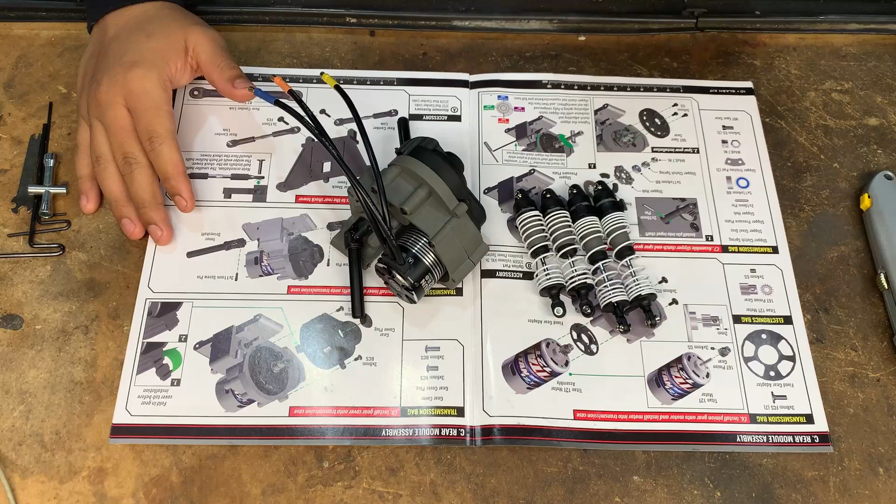Welcome back to the RC Garage, and today is part 3 of the Traxxas slash kit build. In the first 2 episodes, we assembled the rear transmission and also the shocks.

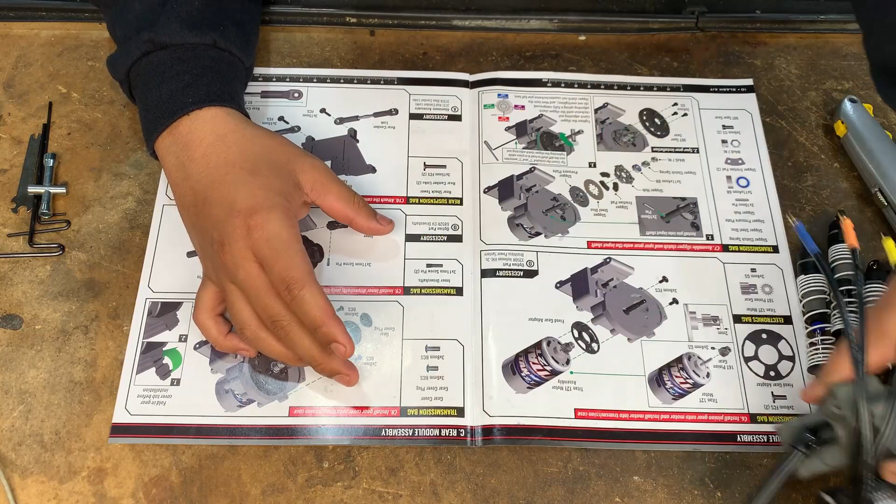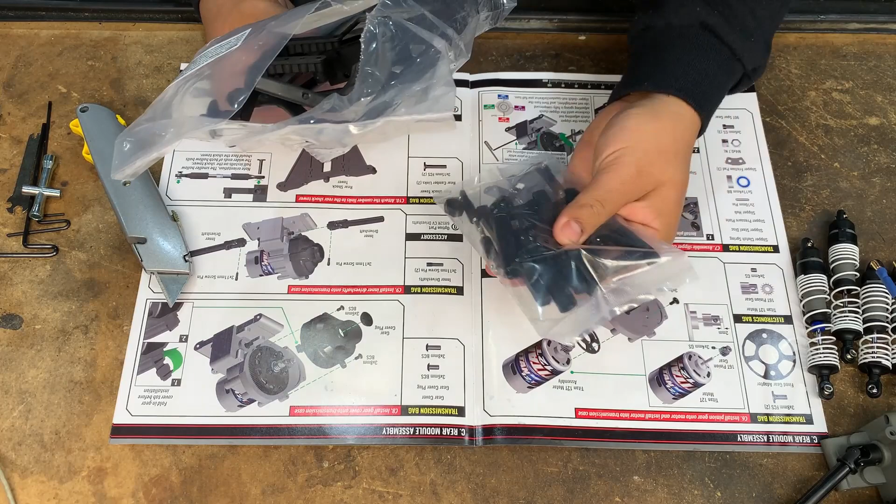Today we're going to start with attaching the camber links to the rear shock tower. I need to go into the rear suspension bag. The camber links are in there, and then the rear shock tower and the screws. There's a lot of screws in here.

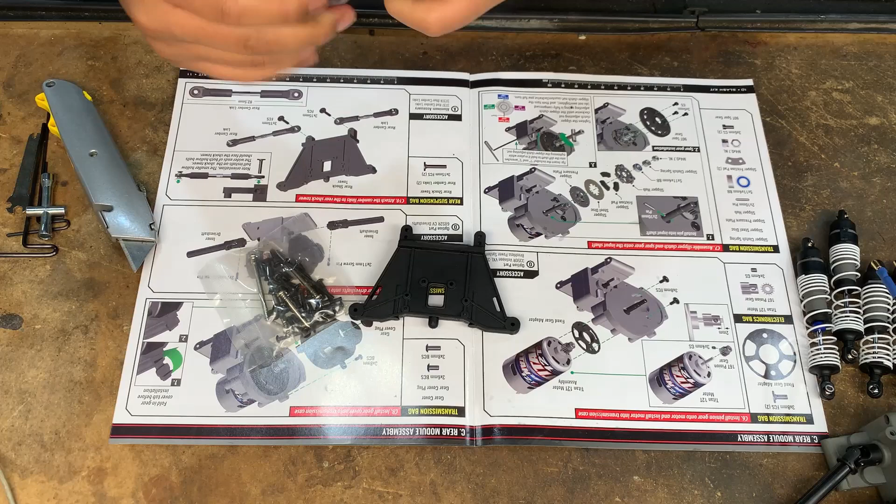Okay, let's get the camber links out. There, 1, 2. Okay, I'll put the rest of this to the side, we will need it later.

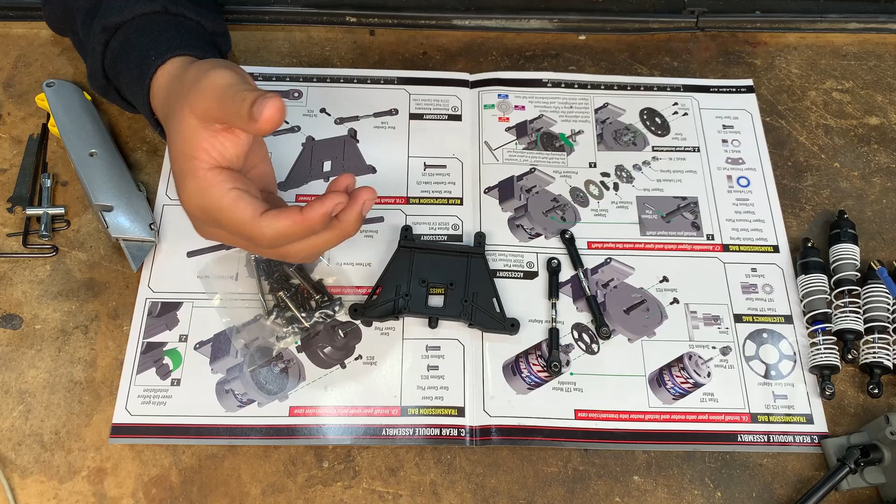And then we have the screws, let's get the screws. Okay, so it's a 3 by 15 millimeter screw. It's kind of hard to tell, but I think it's this one. And then there should be one more in here. Yeah, right there, and this one. Come on, come on. There we go, out. They're the same? Yeah, they're the same, and I don't think there are any other 2 screws like that. Nope, that's it. Okay, so we're gonna put those off to the side.

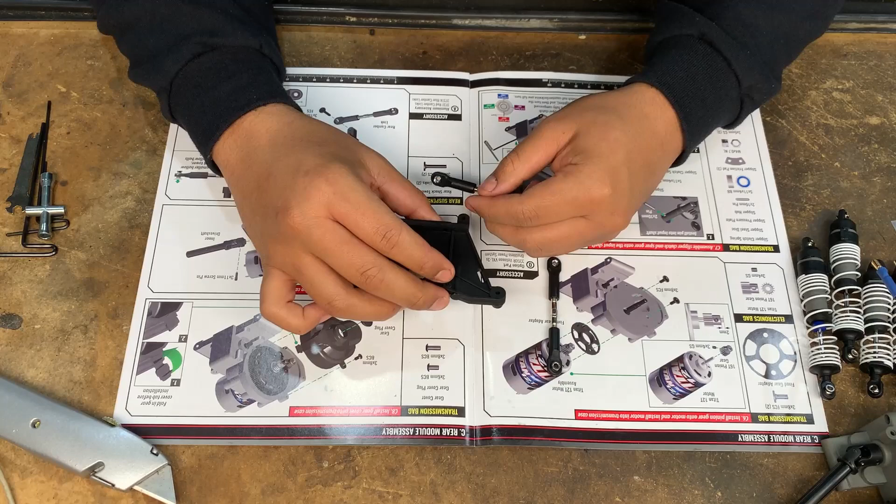Does it matter which way it goes? No, okay. It doesn't matter, but it matters outside and inside - it doesn't matter which actual camber link I use. So we're just gonna attach these. We're gonna put the side that's sticking out right here towards the outside, and then it goes into the bottom hole on the shock tower.

Does it matter which way the shock tower goes? I don't think so either. Oh wait, yeah, it does. So the part that the shock mounts, where it's coming out the back, you're gonna put it on the opposite side, the flush side. You're gonna put these camber links on that side. So I'm just gonna screw these in real quick.

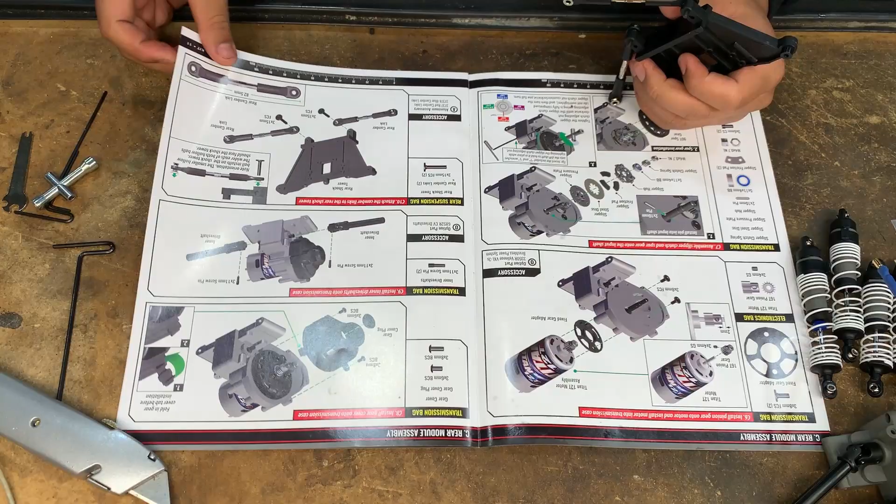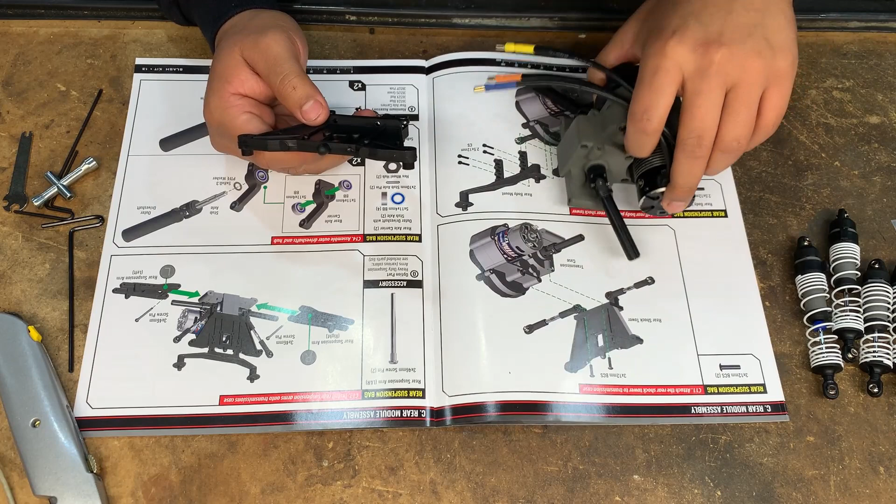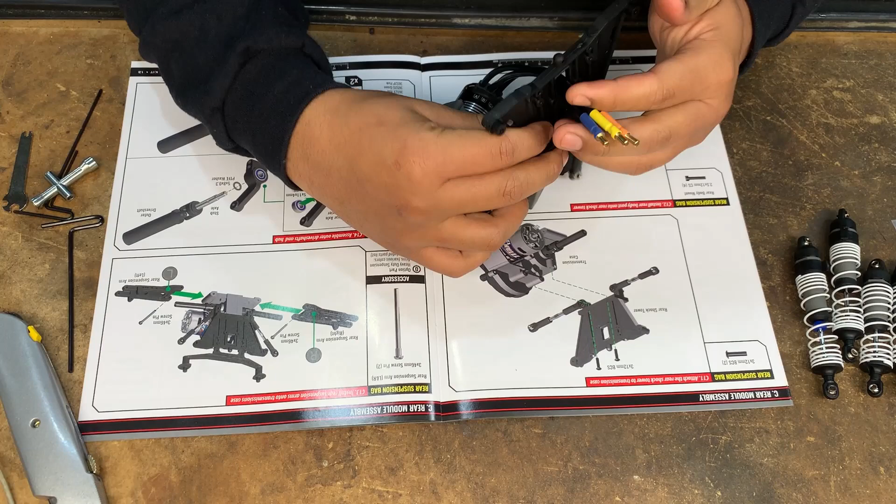Alright, so I have the 2 camber links screwed on. So next page - now we are gonna attach this to the transmission. Like this, it's gonna turn around like this, and then I'll put these through here. And put that right there. So it should go just like that.

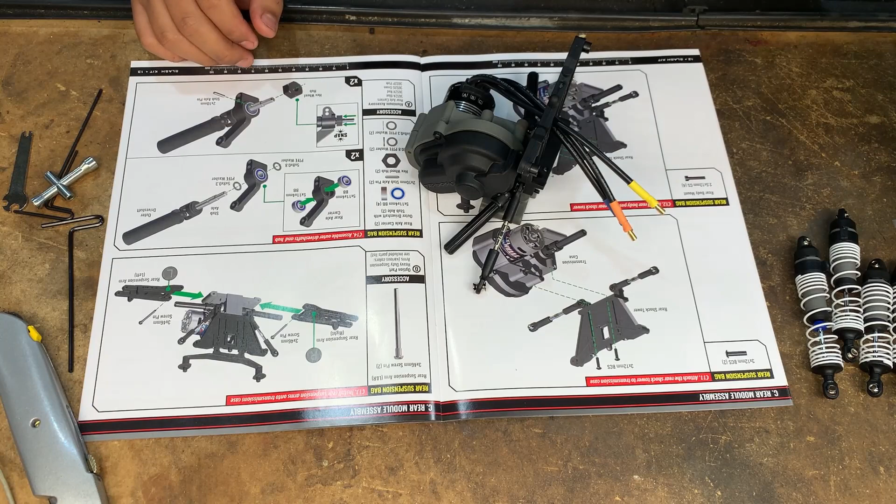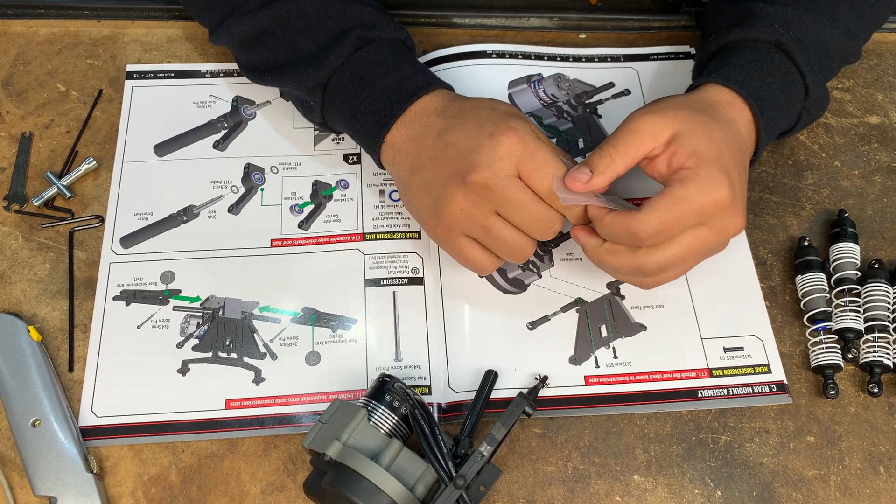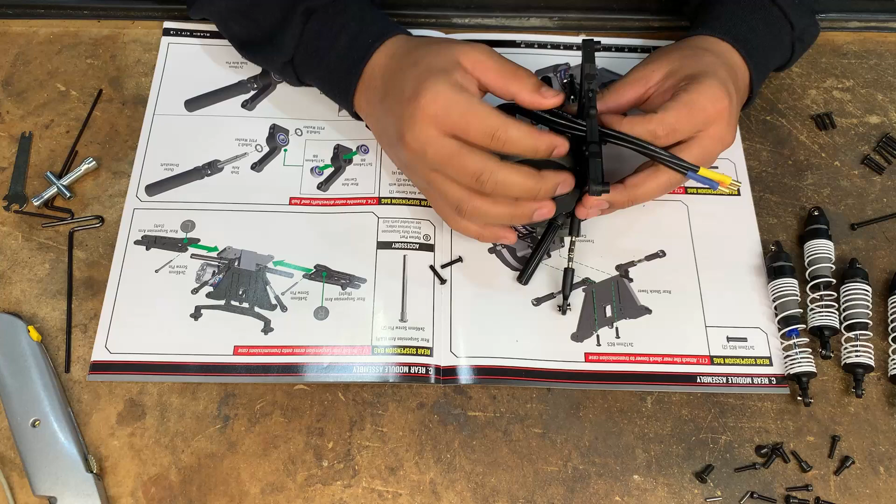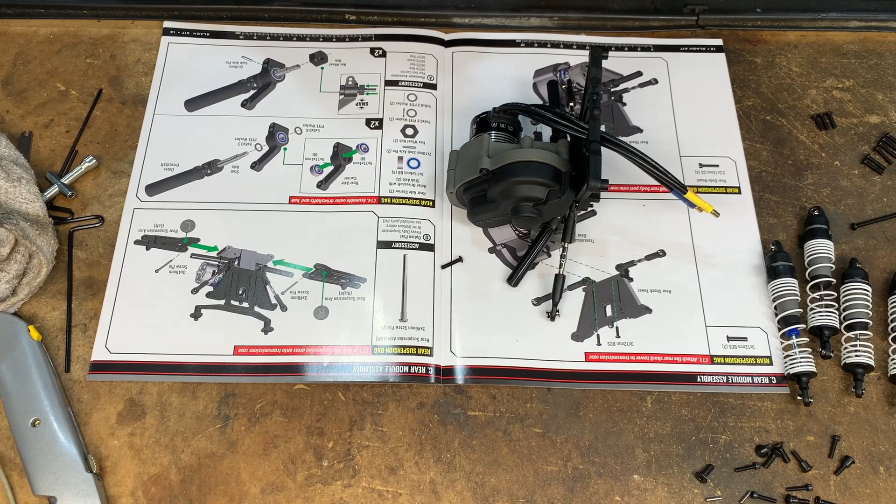So it's gonna be the 3 by 12 millimeter button head screws. I'm gonna just pour these out to the side because we're gonna use them all right now. Okay, so I have the two 3x12mm button head screws, and we are just gonna put these in. I'm gonna just set it in there with my needle nose pliers. There we go.

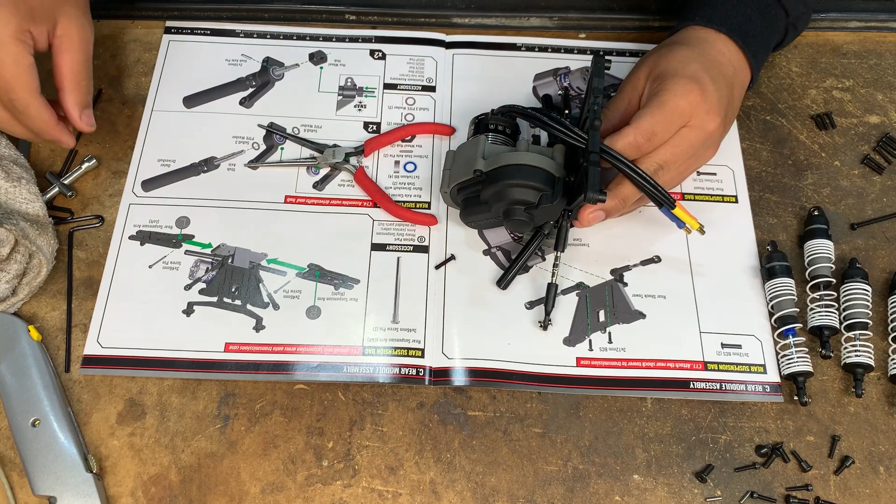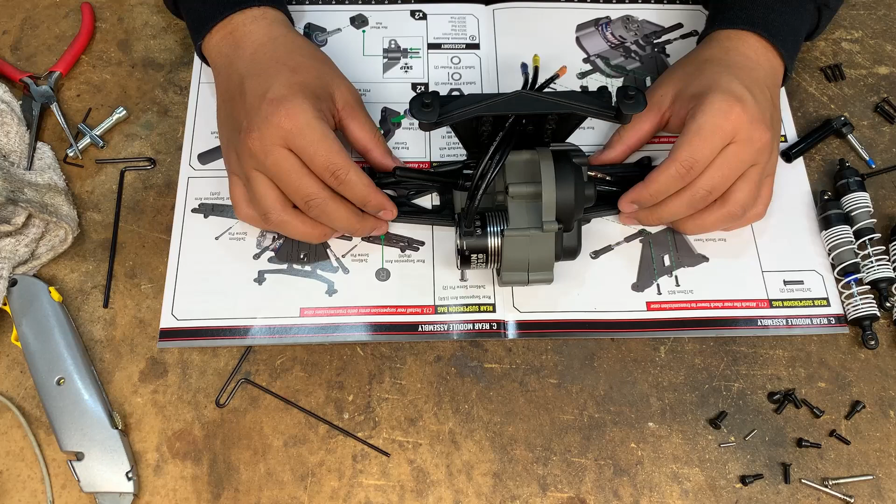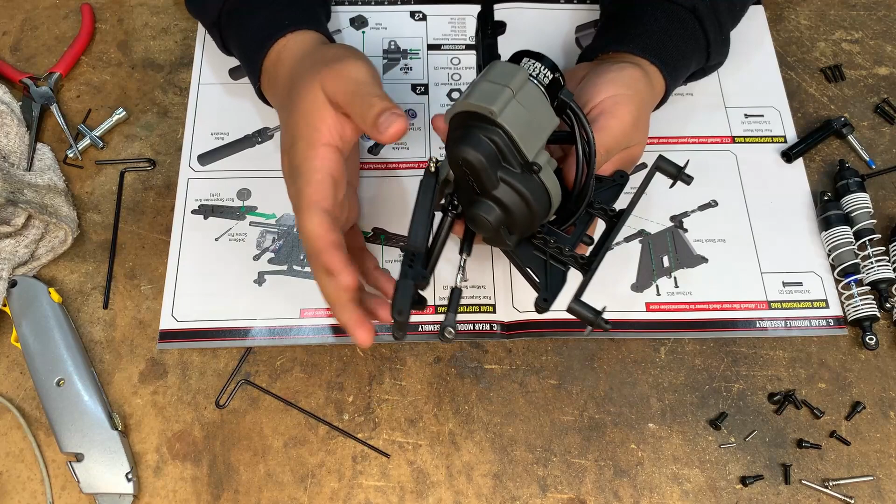Alright, my bad guys, I guess I forgot to press record last time I stopped. So you guys didn't catch me - it was just basically putting on the body mount posts, and then I'm starting to put on the A-arms. I haven't screwed them in yet, just put the pins in, and I'm about to screw them on. Sorry, I forgot to press record.

But let's tighten up these pins for the A-arms. Okay, that A-arm is in. Both of the A-arms are good to go.

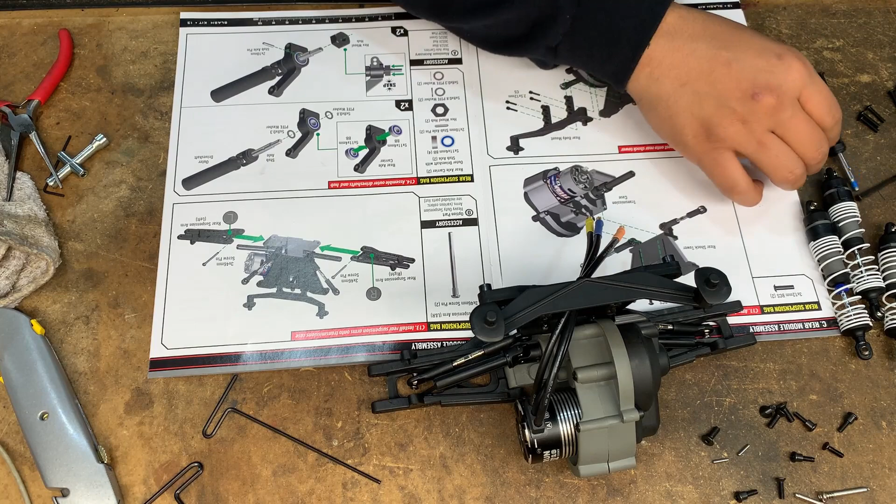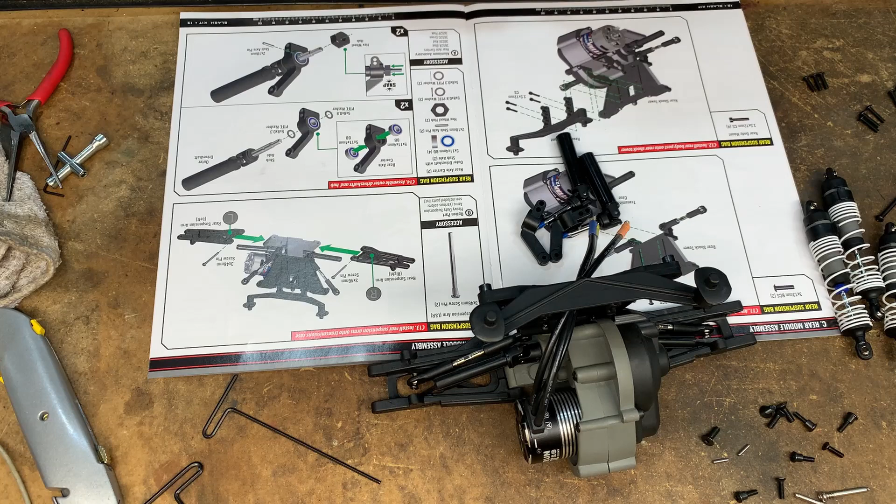Now we're going to go and assemble the outer drive shafts and hub. So, going to the rear suspension, get the two axle carriers, and then the two drive shafts right here with the hubs, and then two of the - well, 4 bearings actually, sorry, 4 bearings. What else do I need? Oh, the pins, obviously the axle pins for the wheel hex, which are right here, and then the wheel hexes, which are right there, and the washers.

Okay, so there's 2 different kinds of washers, a thinner one and a thicker one. Let me see if I will even be able to tell the difference. Okay, the last washer does not want to come out. Oh yeah, you can tell the difference - I just dropped them on the page and you could tell the difference already. Okay, yeah, you'll be able to tell the difference.

Alright, so we're gonna get the axle carriers. Are they the same, or are they directional? Nope, okay, I think they're the same. So just gonna put a bearing on each side of the axle carrier. Make sure it's all the way in.

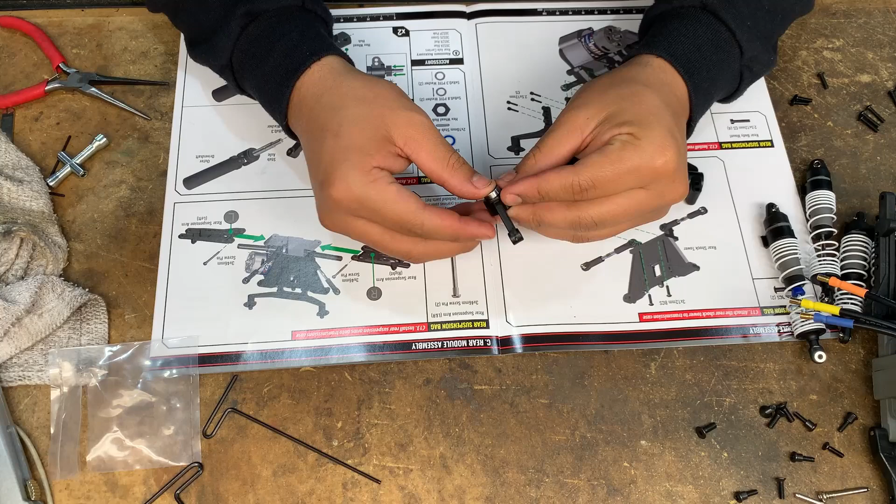Okay, sorry, it's just in the way. Put that off to the side for now. Okay.

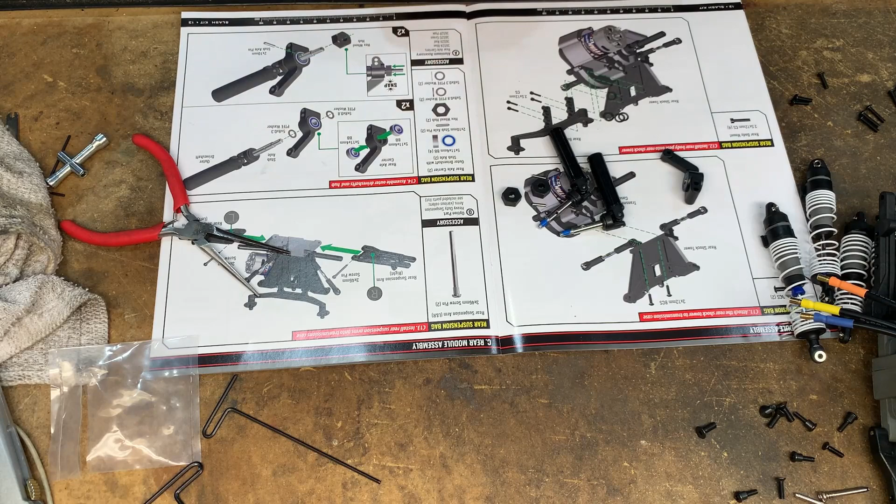Now we're gonna put a thinner washer on the actual axle, or the outer drive shaft, on the axle, whatever, same thing. So you're gonna put the thinner washer on this, then you're going to put the axle carrier on, then you're going to put a thicker washer after you put on the axle carrier, like that. And then you're going to put the pin in.

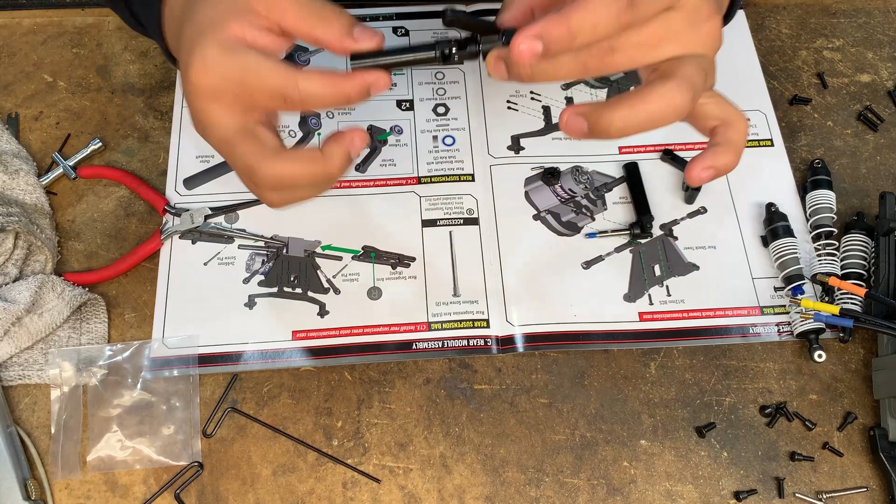And then you're going to put on the wheel hex, and then you want to hear it snap. There we go. So there, it snapped, and that is assembled right there. I'm gonna get the other one done real quick. Alright, so now both of these are assembled, and we are gonna move on to the next page.

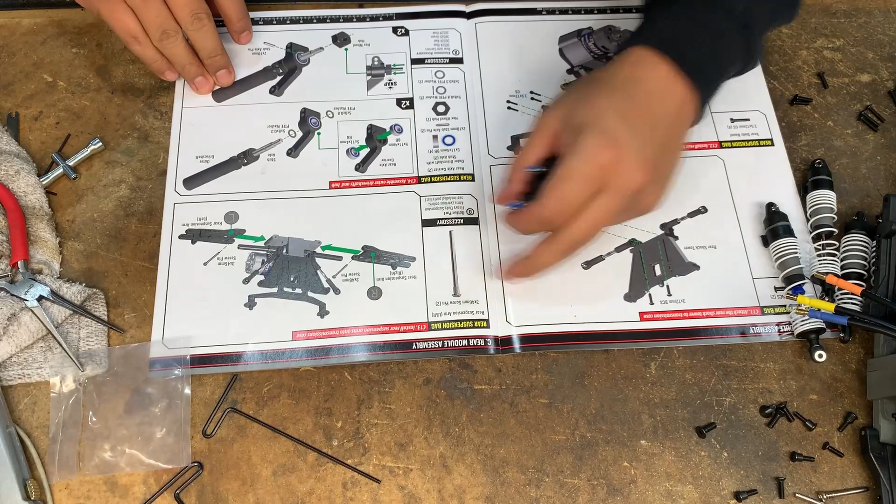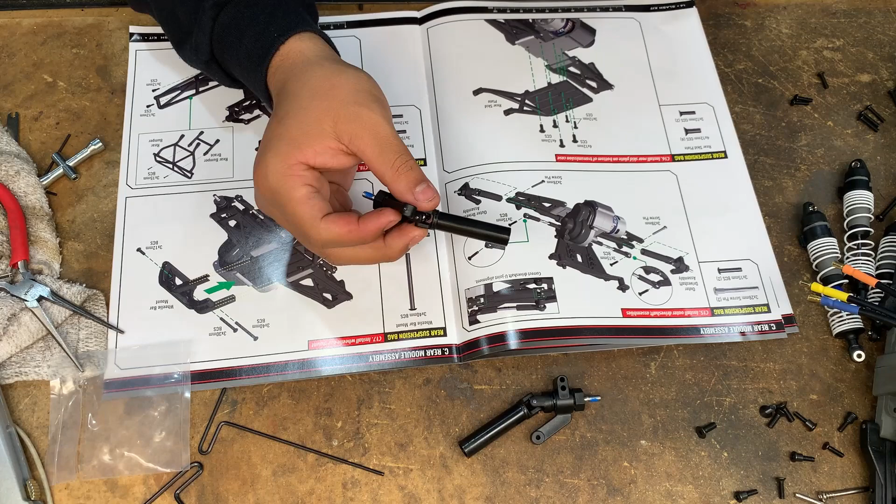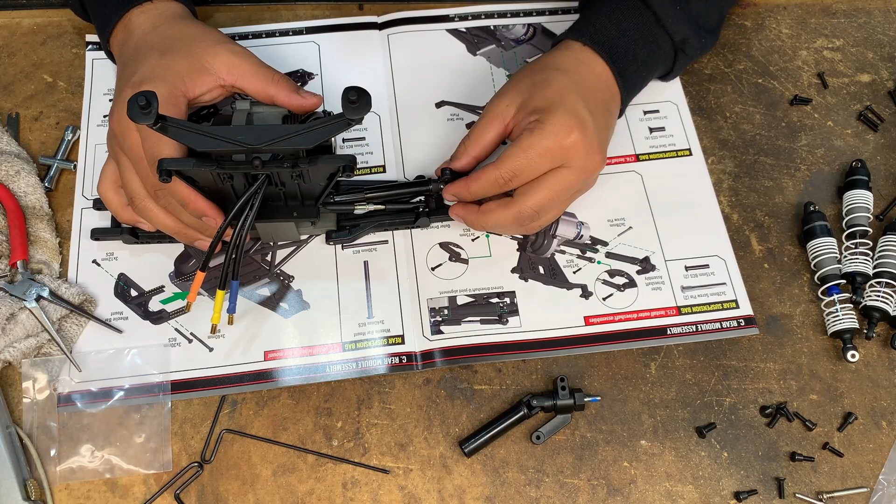Next page is we're gonna install outer drive shaft assemblies. So we're gonna get this, face it towards us like this. Then we are gonna put in one drive shaft on one side, like that, and mount that up like that.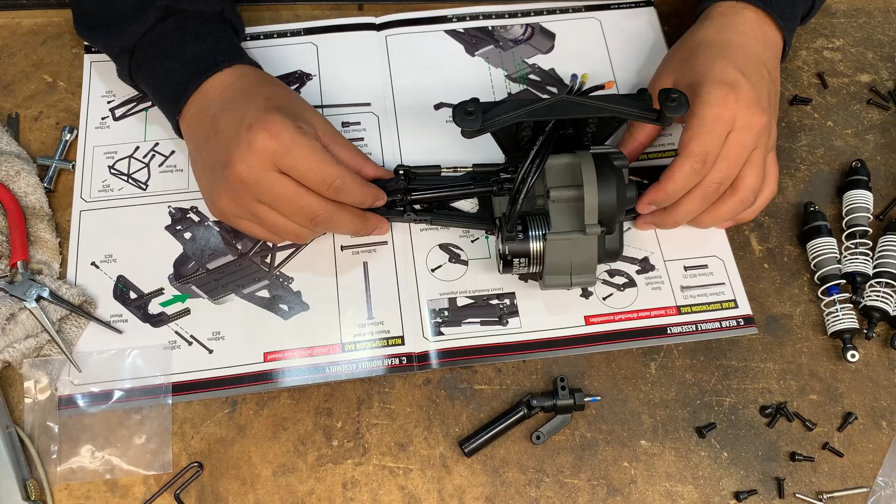I'm gonna flip it around so it's easier for me. Alright, so that's in there. And then what you're also gonna do is from the back side. Okay, so if it's like this. So from this side, you're gonna get your other screw pin right here, the shorter one, 3 by 28 millimeter, and you're gonna put it in the bottom hole of the axle carrier. So let's do that. There's going through the bottom hole. Oh, and that's one side done.

Now I'm gonna head over. I'm just gonna go and do this side real quick. Okay, we have the drive shafts in, and everything is turning, spinning, working.

Cool, cool. All right, now we're gonna go and install the rear skid plate on the bottom of the transmission case. So face it like that. Rear skid. So that's gonna go like this. Boom.

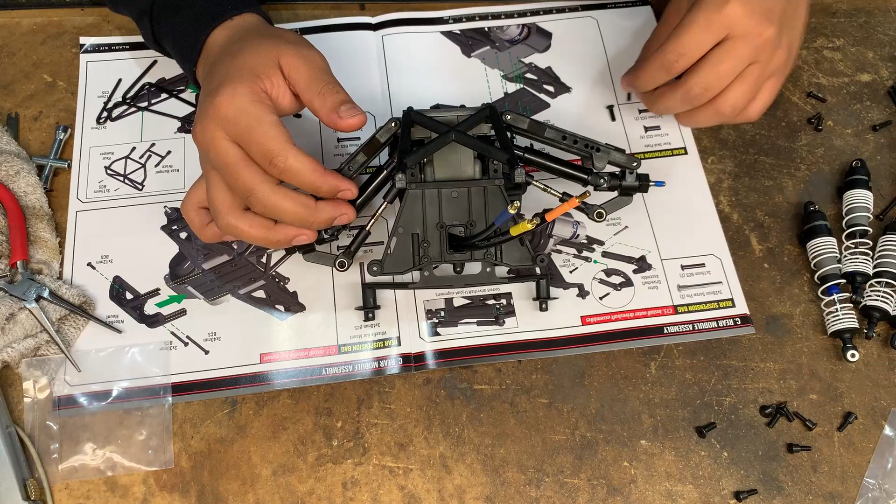So we're gonna need 2 of these two, and then these 3, 4, sorry, 4. These 4. Okay. And so it's just gonna be the 4 by 12 millimeter countersunk, 4 of them, and then the 3 by 12 millimeter countersunk. So you're just gonna put them obviously where they go. So I'm just gonna tighten these up real quick.

Okay, we got the rear skid plate on. Now we are going to go to the wheelie bar mount. Get that out of the bag. So let's install that right there. First.

There we go. So it just slides onto the chassis, well, not to the chassis, but the rear of the transmission. Actually, the wheelie bar mount slides onto the skid plate, and then you're gonna use the 2 long screws and a 3 by 12 millimeter screw. So the longest screw goes...

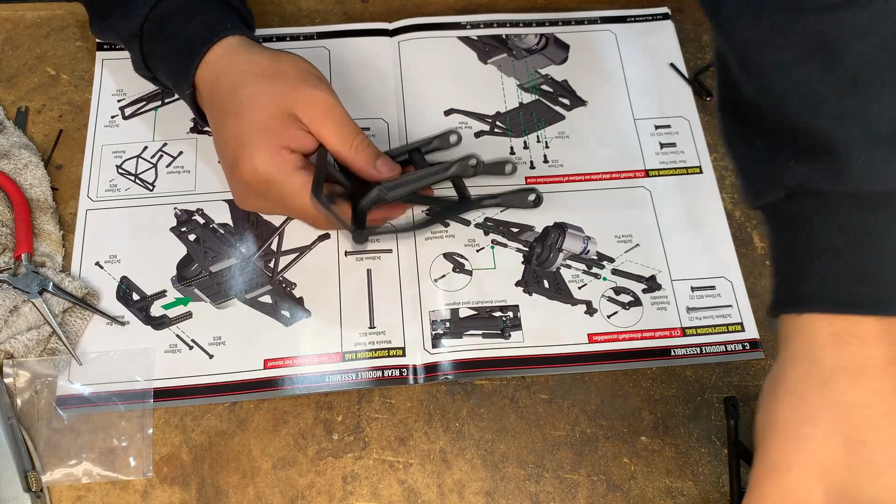Okay, I got the rear bumper brace on. Now we are gonna attach it to the wheelie bar mount.

All right, guys, that is the rear bumper installed, and I think that is gonna be it for this video, guys.